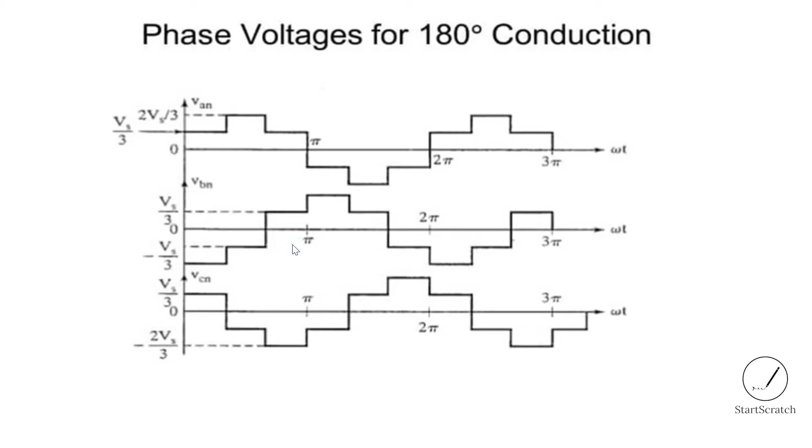And apart from this, we can observe here that the phase A, phase B and phase C voltage waveforms are shifted from each other by 120 degrees. So in the previous video, we have seen the gate triggering pulses for this three-phase inverter which is operating in 180 degree mode of operation. And now let us connect a three-phase resistive load.

For that, take a series RLC branch. Change the branch type to resistive, and we will consider a resistance of 100 ohms. Copy this block. Connect these resistances in bridge configuration. Take a voltage measurement block so as to measure the voltage across the load side.

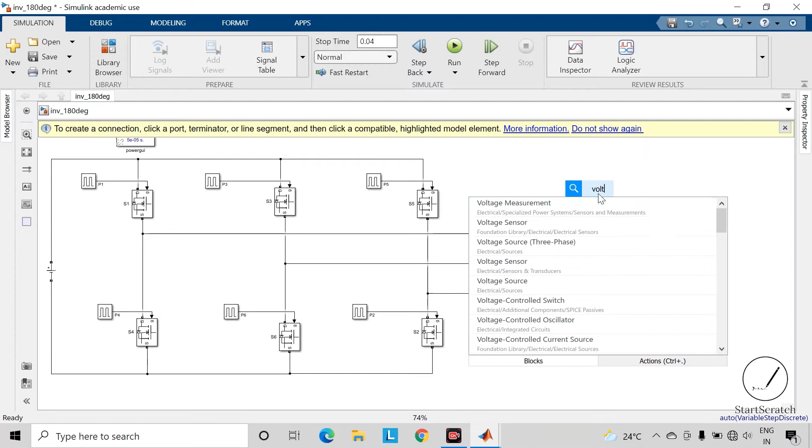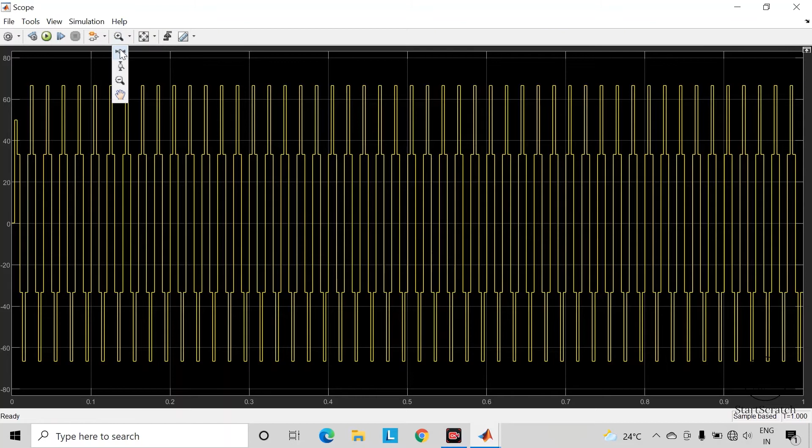So first of all, let us check the voltage across phase A. Take the scope block and connect this voltage measurement block to the scope. Let us consider the stop time as 1 second. Save the changes and run the simulation. Open the scope block. So this is the output voltage waveform which is obtained across phase A.

Here we have given a DC voltage supply of 100 volts, and here you can observe 6 different steps for phase A. This is the first step, and the magnitude of this first step should correspond to Vs/3. So here this magnitude is 33 volts, which corresponds to 100 divided by 3. In the next step, the magnitude should correspond to 2Vs/3. So here this magnitude is almost 66 volts.

In the further steps, the voltage magnitude is decreasing again, so it is now becoming 33 volts. And similarly, you can check the voltage magnitude in the negative half cycle as well. First it becomes minus 33, then it changes to minus 66, and then again it changes to minus 33 volts. And this waveform gets repeated further.

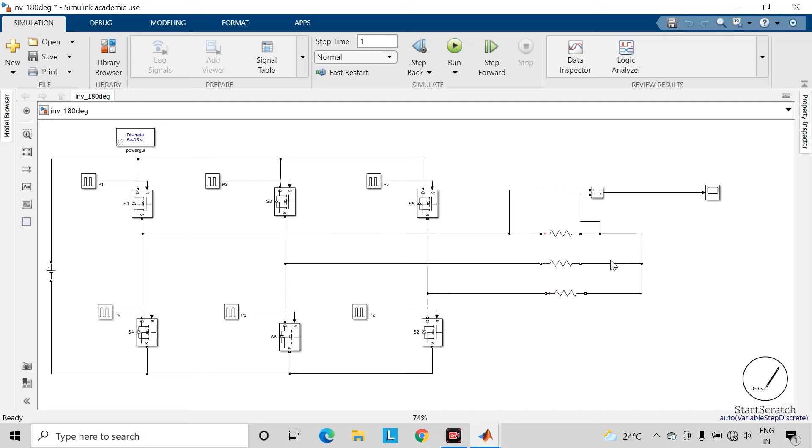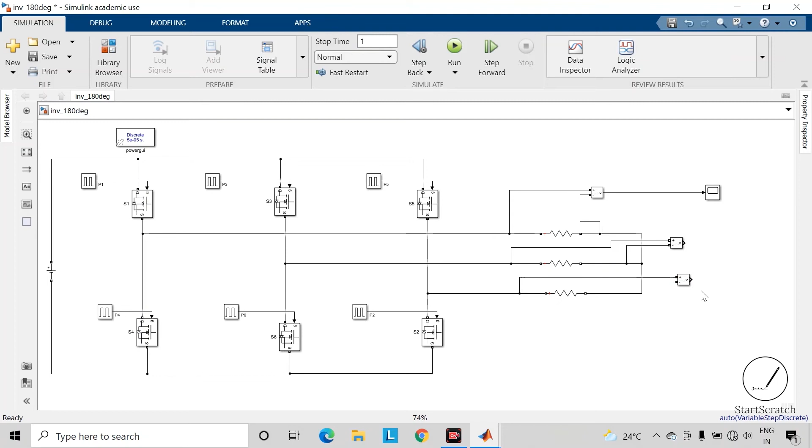Now let us connect the voltage measurement block across phase B and phase C. Copy this voltage measurement block and connect it across phase C. Change the number of input ports of the scope block and the layout as well. We will give names to these signals. Connect these voltage measurement blocks to the scope block.

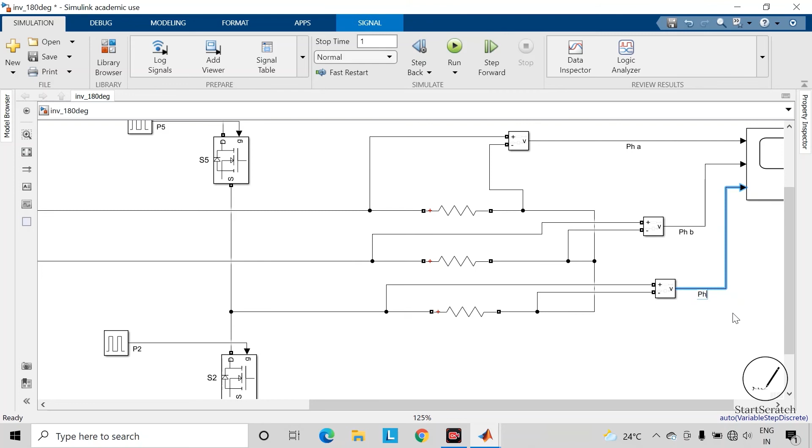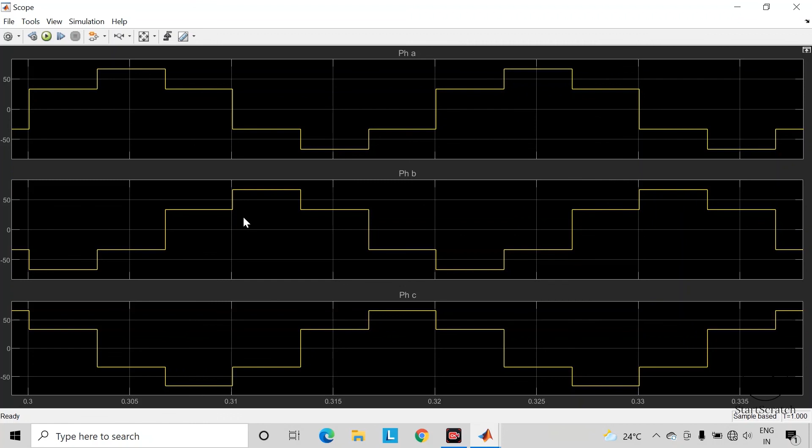Now save the changes and run the simulation. Open the scope block. So here we have got the voltage waveforms for phase A, phase B and phase C, and you can observe that all these phases are shifted from each other by 120 degrees. So that's all from this video.